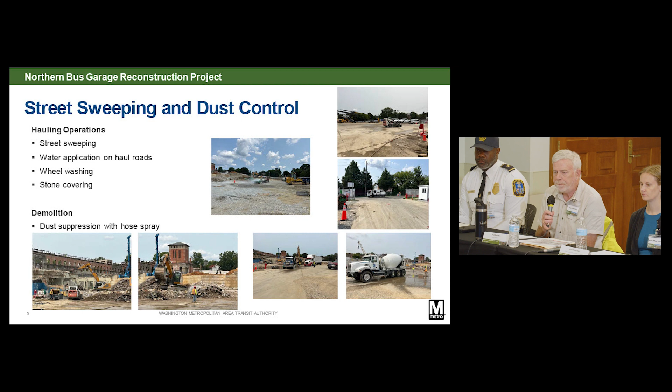General construction progress since the last meeting: in quarter two, we finished the asbestos abatement inside the building. This was for a very limited amount of mastics associated with floor tiles, all done under DOEE supervision and with a city licensed asbestos mitigation firm.

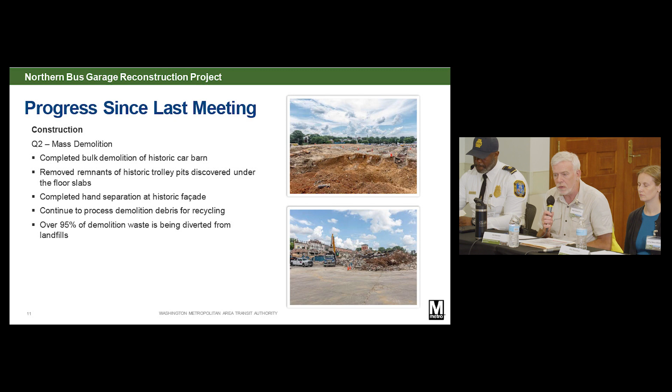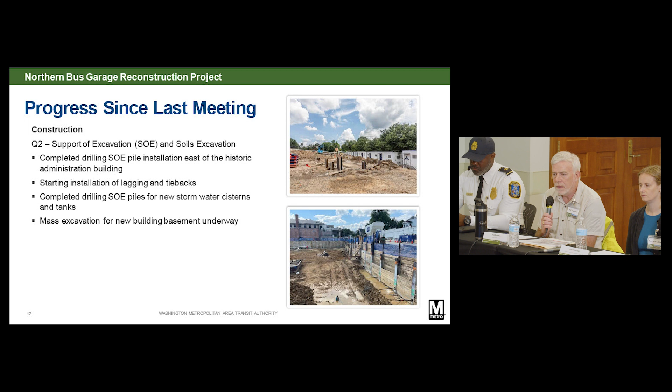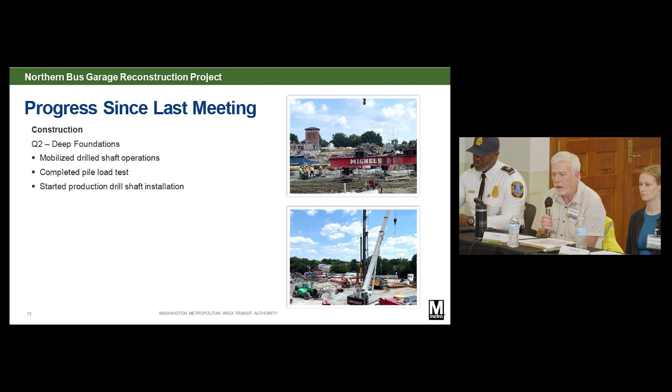There we go, all right.

From the standpoint of the battery electric bus design update, Amy will be giving a more detailed update on the larger program shortly, but we did complete the design reviews with WMATA of the 40% level of effort. WMATA also in the last quarter completed the finalization of the design criteria updates to their standards specific to battery electric bus. We have completed an initial fire hazard analysis, and that remains under review by the WMATA team. We continue to work closely with biweekly meetings with PEPCO as they work to identify and design the new routing for the services that will feed the battery electric buses at Northern. Right now, all of that looks like it will run underground from their Fort Slocum substation, located to the north of us.

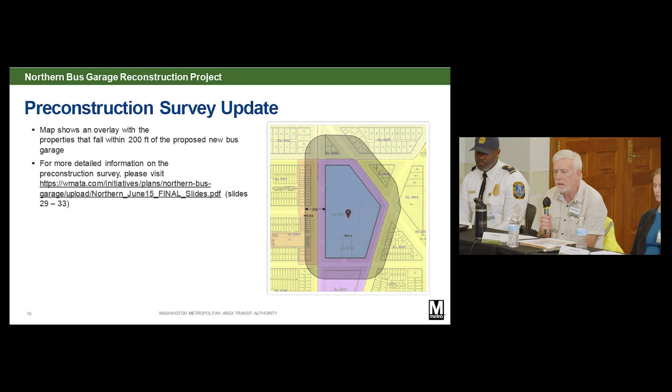Pre-construction surveys: each time I visit with you, I remind everybody to take advantage of this opportunity. We would certainly like to see more response than we have to date, but all the ones that have been requested have been completed. The contacts remain the same for either a phone number or an email. The property owner of record does receive a copy of that survey, and it just helps you document the conditions before we started. In the event there is a claim in the future, this helps the processing of that claim. As we've noted previously, this survey is informed by the Department of Buildings and FTA guidelines.

It is eligible for all those properties that are within 200 feet of the property line—that's that gray overlay. So if any portion of your property falls inside that gray shadow, your property is eligible. The contact information, again, remains on many of our presentations from the past several quarters.

So the Metropolitan Transit Police Department substation - there's been a number of questions about these. It is located in the southwest corner of the site where 14th and Buchanan are. The area covered by the red circle is the general space that will be occupied by Captain McKinney's team. They have a total of 3,890 square feet of space allocated.

Inside of that, there are 13 officer workstation cubicle type spaces, 2 enclosed offices for sergeants, a break room for the officers, a firearm maintenance room, a roll call / conference room, a small locker area for both men and women officers, a unisex restroom, and an IT communication closet for their services and systems.

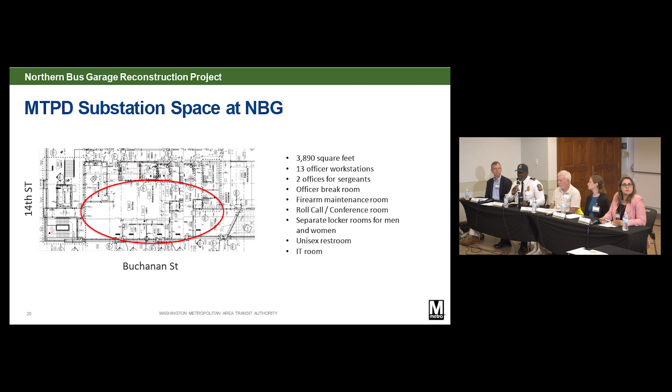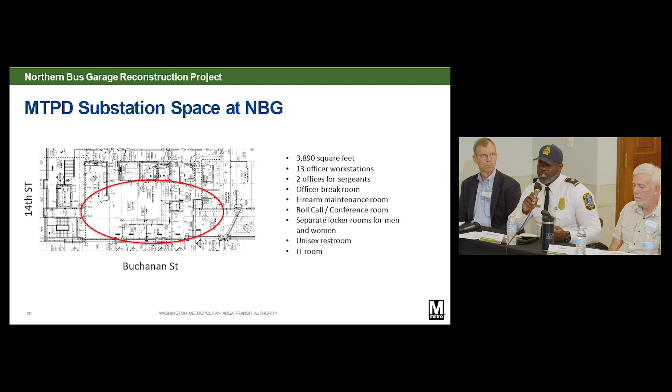And I think at this point it brings us up to a Q&A break. I'm Captain McKinney, and I would just like to reiterate that for this space, this is going to be an administrative function only. It will be specifically geared for us to do training with our bus operators, and we will not have any officers permanently assigned to this location. I just wanted to go ahead and piggyback on this slide.

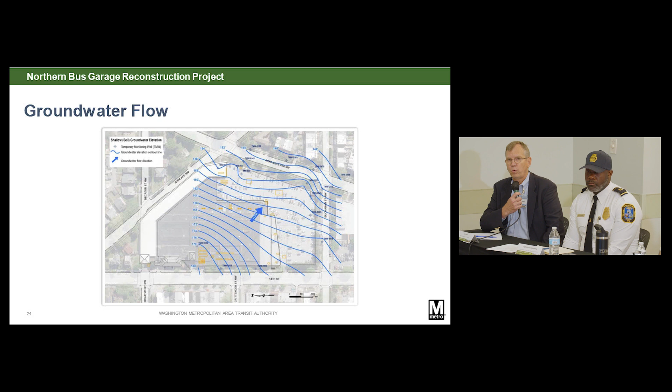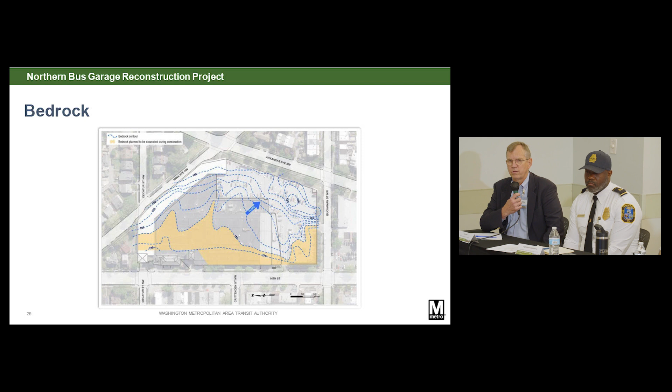By way of background, groundwater flow is flowing to the northeast from the site, towards Arkansas Avenue. Likewise, the bedrock surface is tilted towards Arkansas Avenue as well. Contaminants heavier than water will go to the bottom of the aquifer and tend to roll along the top of the bedrock.

We've also found the Department of Energy and Environment directive letter that applied to those tanks, where we disclosed to DOEE that the tanks were present and removed them. We're working to find the full file on that, but we've been able to start documenting our past efforts toward remediation. That doesn't change what we have to do, but it informs our approach and understanding of the site.

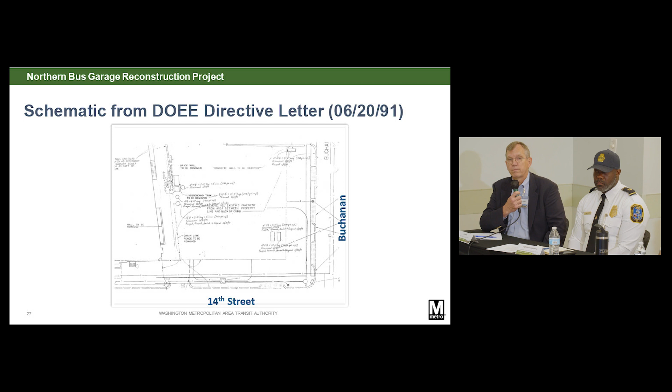I'm going to talk first about investigation tasks, then turn to remediation tasks. DOEE has asked us to prepare a comprehensive work plan to address investigation of the site, addressing both the UST and land remediation tasks, integrating the work we've already done. Among those, DOEE has asked us to install 7 additional wells. I'll have a graphic on that in a moment.

Based on our discussion last week, we will develop and submit to DOEE an interim corrective action plan. The idea is to address activities on the site associated with the soil. This will not address activities associated with groundwater, which will be covered under a separate deliverable.

We will install 7 wells to better understand and delineate groundwater as it leaves the site and what contamination is leaving the site. DOEE has asked us to sample wells quarterly and submit a comprehensive supplemental site assessment report. We've already submitted one focused primarily on underground storage tank issues. This follow-on will involve an integrated assessment of soil, groundwater, underground storage tanks, and other contaminants that might be present. Once that's done, we'll submit a final CAP addressing both soil and groundwater issues.

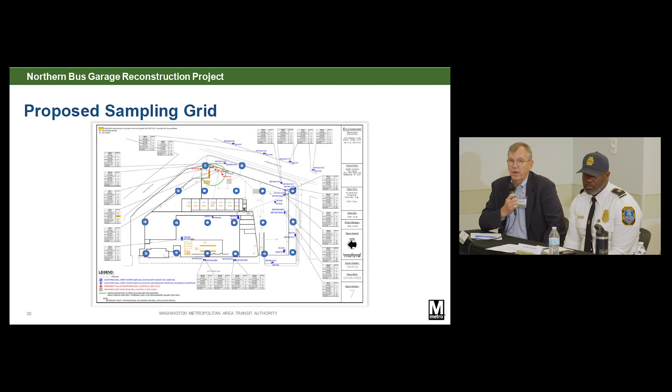So this was our first proposal to DOEE, with 19 samples. We've sharpened our pencils since then, and it looks like the total number of samples we'll collect will be above 30, and that grid will be included in our interim corrective action plan.

Now I'm going to turn to the remediation activities for the site. These should look familiar, as we've presented them previously. We will remove all underground structures and storage vessels, all the pipes and connecting functions.

Impacted soil will be excavated and sent off-site for disposal, especially in areas of petroleum impacted soil and other areas of impacted soil as we encounter them. Free-phase petroleum product, that is petroleum floating on top of the groundwater aquifer, will be pumped out and put into a Baker tank, then shipped off-site for disposal at an appropriate treatment facility.

If we encounter dense non-aqueous phase liquids, such as chlorinated solvents present in a free phase, we will pump those out and send them off-site for treatment and disposal. We don't believe we're going to find that based on the concentrations of chlorinated solvents we've seen so far in our investigations, since we've looked in the places where we'd expect to find those materials. But if we do find DNAPL, we will pump it out and take it off-site. DOEE has asked us to install sentinel wells, complete monitoring, and then do groundwater remediation as necessary.

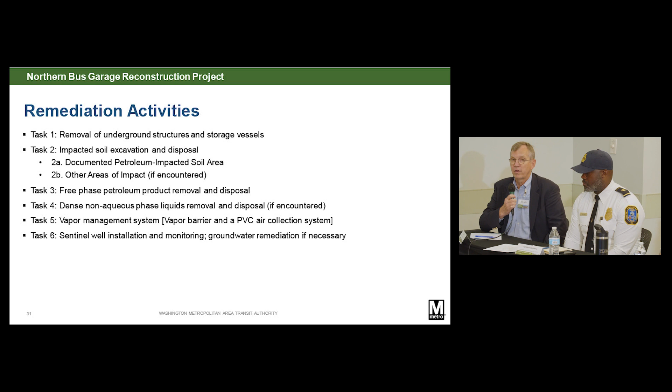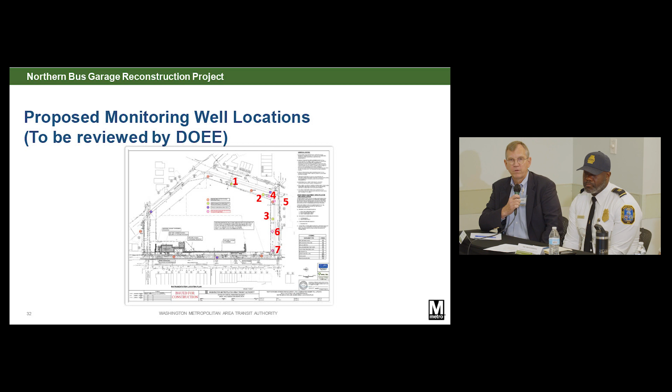All right, I'm going to set aside environmental remediation for a moment and turn to dust monitoring and noise and vibration activities. Earlier today, we posted the June 2023 dust monitoring, noise, and vibration report, available on the Northern Bus Garage website. We are reviewing the July 2023 report, which will be posted once we've completed our quality reviews.

I've got graphics showing this, but we have 3 dust monitoring points located on site. We've set internal thresholds, based on our understanding of regional standards, for dust monitoring exceedances. We identified some exceedances in the period June 7th through June 9th, and again on June 29th. You may recall the Canadian wildfires and smoke in the area in early June, so the exceedances we saw during June 7th through 9th indicate we were seeing the same thing in our equipment. The June 29th exceedance was a regional event, meaning there was an air quality issue across the entire region, and our instruments detected that as well.

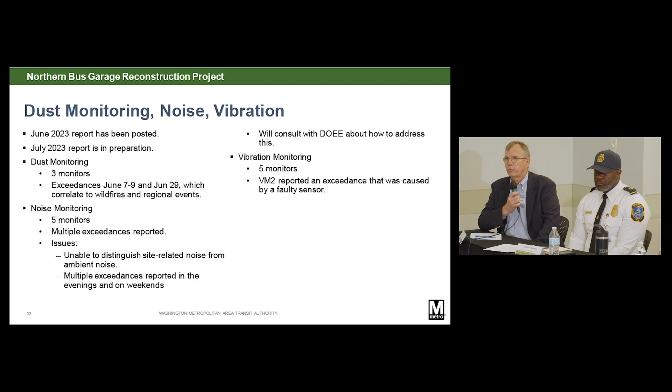Vibration monitors, we had one exceedance, and after we looked at it, we determined that it was a faulty sensor. The equipment was not working properly, but otherwise we've not had any exceedances. Slide, please.